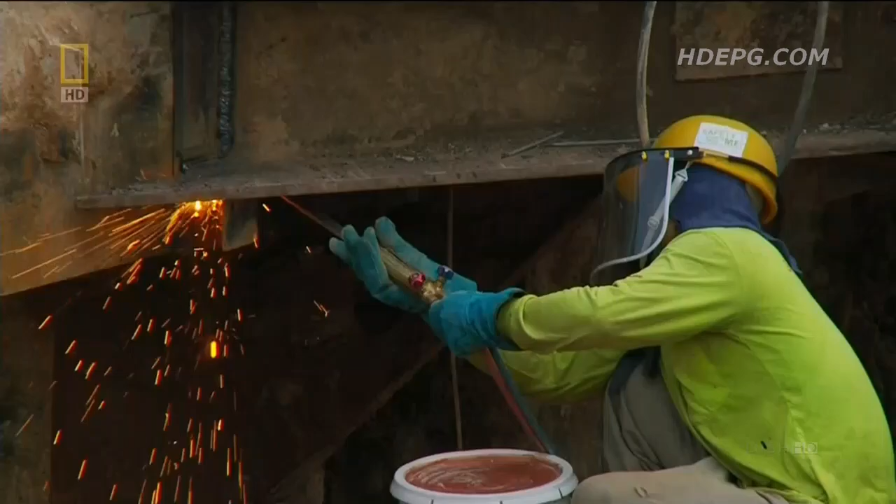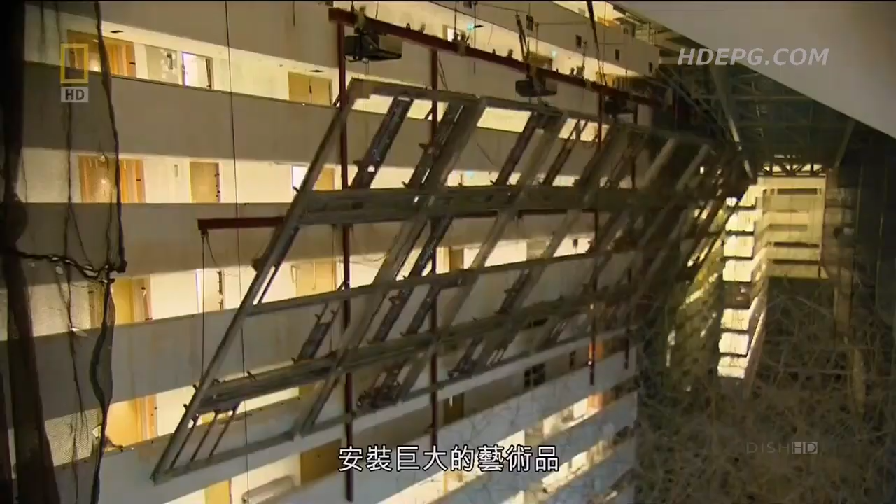Singapore's Marina Bay Sands is one of the world's most complicated construction projects. Engineers have to build not one, but three skyscrapers that will shoulder a sky park as big as an aircraft carrier. Worst case scenario, we get stuck. They have to devise ingenious solutions to assemble a 60-meter tall museum of impractical dimensions, install giant artworks, and erect seemingly floating pavilions for shopping and entertainment. If engineers succeed, they will create a virtual city unto itself.

Singapore, the Southeast Asian country, is smaller than New York City. The lack of space forces it to build its largest leisure and entertainment hub to date on a small tract of reclaimed waterfront land.

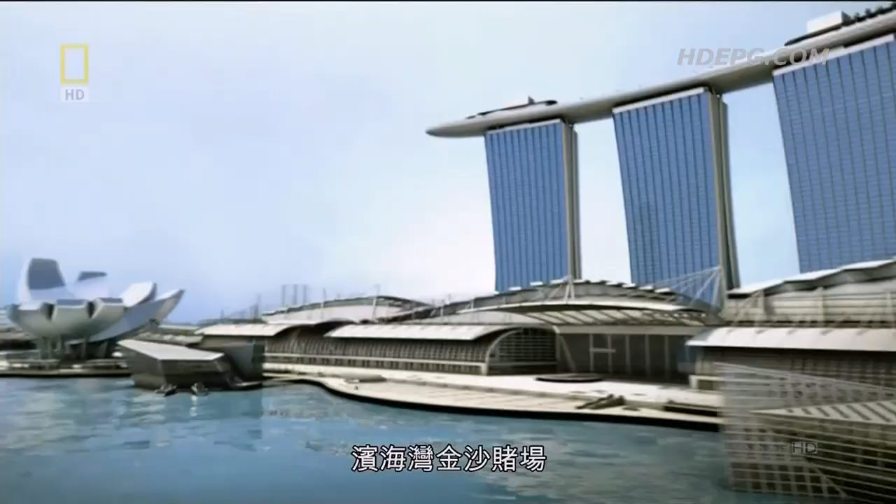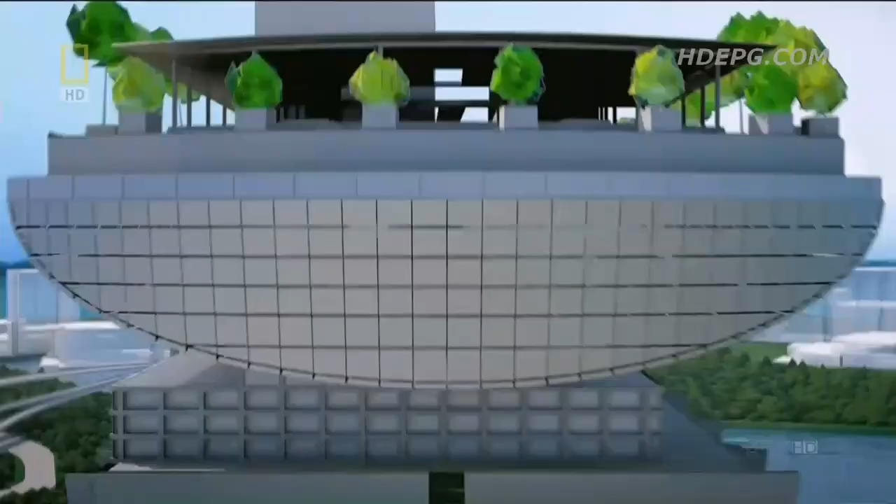The Marina Bay Sands. It's not one megastructure, but many. Serious challenges lie in the array of buildings that form the unique complex. Three 57-story hotel towers slope at such great angles, they're in danger of buckling under their own weight. An even bigger problem is the hotel's roof. A 340-meter sky park spans its length, containing gardens, outdoor pools, and the world's largest cantilevered observation deck. But how do you build something as big as an aircraft carrier, 200 meters in the air?

In the hotel's atrium, mammoth works of art have to be somehow incorporated into the architecture. Its challenging centerpiece, a 15-ton mass of steel by a renegade artist from Britain.

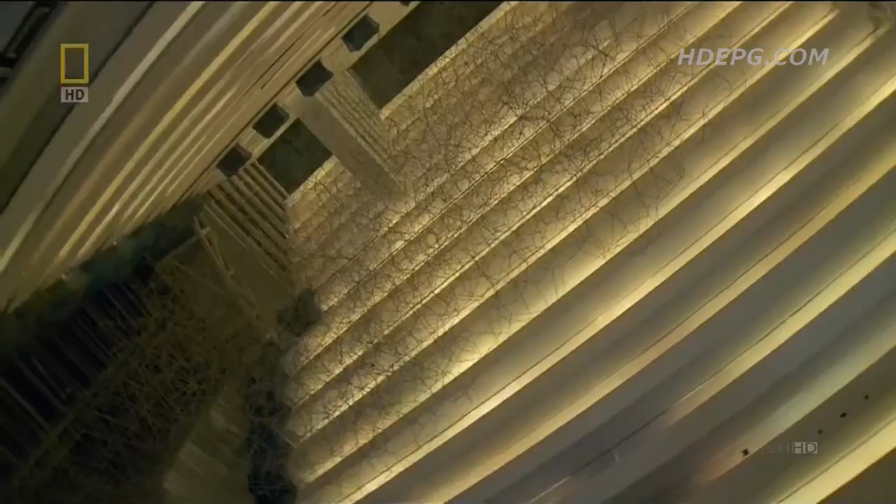A 60-meter tall Art Science Museum is designed for maximum visual impact. It will be to Singapore what the Opera House is to Sydney. Only one problem: it seems too impractical to construct.

And a set of dramatic glass-encased pavilions, while themselves pose little challenge, have to be built in water.

The man behind the Marina Bay project understands the risks, but he believes that anything short of astounding will fail. Sheldon Adelson, one of the world's richest men and CEO of Las Vegas Sands Corporation.

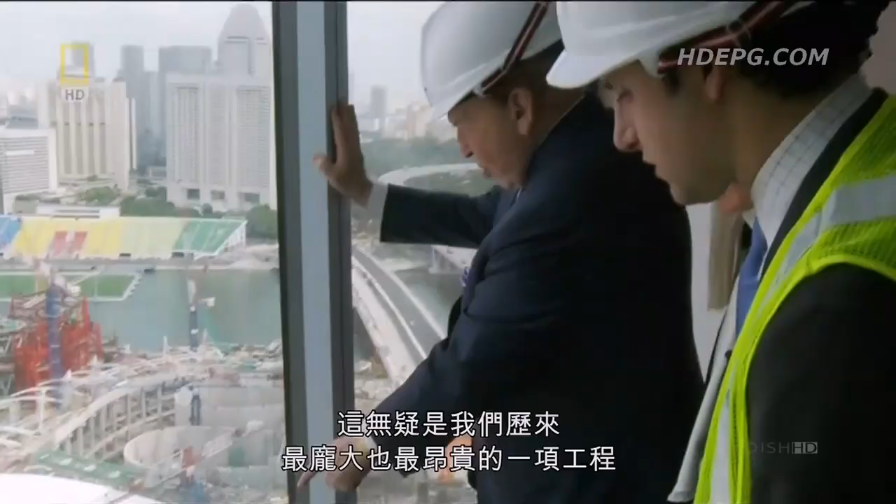What we hope to accomplish is to change the face of Singapore tourism. So we expect a very successful development. That is by far the largest and most expensive single project we've ever undertaken. It'll cost about 5 to 5.5 billion US dollars. It's a lot of money. Now, I know a billion dollars doesn't buy what it used to, but by any measurement, it's a lot of money today.

Adelson believes his huge investment is safe in the hands of Moshe Safdie, a world-renowned architect. Safdie is recognized for his use of dramatic curves and geometric patterns. The Marina Bay complex will be his largest and most difficult project yet.

I think that architecture has to be timeless. Therefore, what it espouses, what it provides, needs to be something that has a long life. What's unique about Marina Bay is all the pieces coming together. You can't think about it as individual buildings. You've got to think about it as a piece of city. It's much more a symphony than it is a sonata.

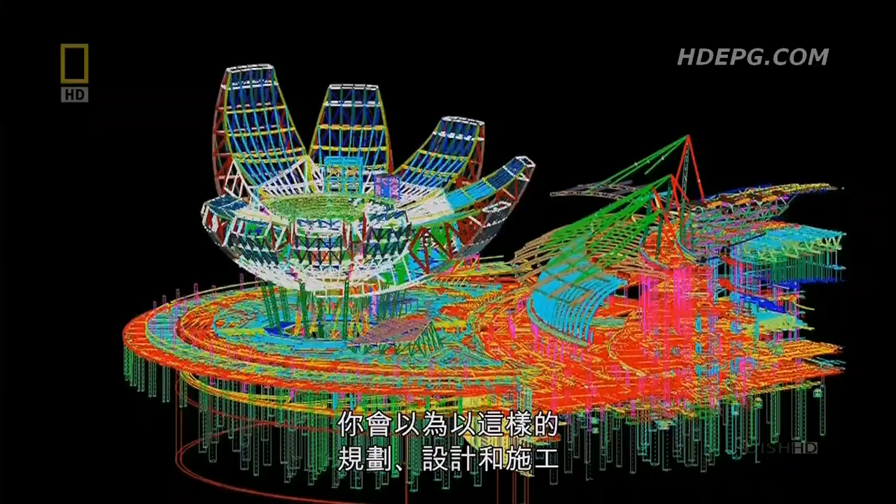On the ground, engineers are more concerned about the reality of building Safdie's vision. This is the North Retail section area. 30-year veteran John Downs is in charge of overseeing the entire project. The design is very, very diverse, and each component of the project is totally different from the others. For a project of this size, you'd expect with the planning, the design, the construction, somewhere between 6 to 7 years. Here is basically a 3-year turnaround.

The first and most critical construction task is to secure the footprint, though this normally straightforward job proves otherwise, since the site was originally allocated for boats. The complex sits on 560,000 square meters of reclaimed land, part of a decade-long plan to revamp Marina Bay, a former saltwater estuary that's now a freshwater reservoir.

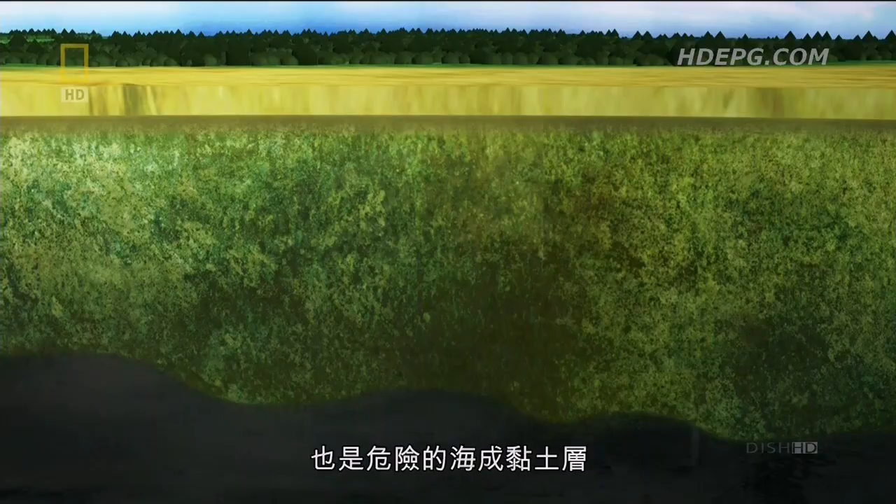Beneath the reclaimed land, which is essentially a seabed, is a dangerous layer of marine clay. Sometimes called black toothpaste, marine clay has very poor structural properties. If not given complete respect, the unstable marine clay is potentially fatal.

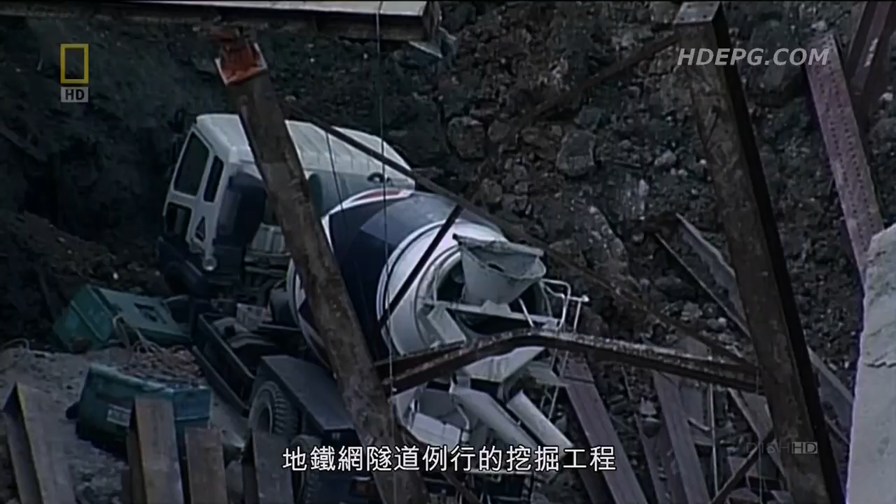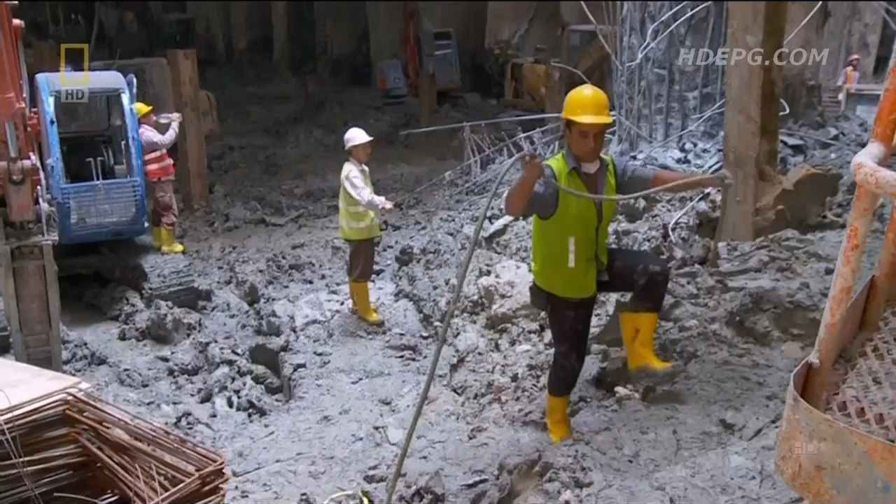In 2004, Singaporeans discovered the lethal consequences firsthand. A routine excavation in an underground tunnel for the mass rapid transit network causes a collapse, creating a gaping hole in the Nicoll Highway, killing 4 workers. The ground conditions in which they were building the Nicoll Highway were not dissimilar to those we are encountering here. They had also soft clay, with similar depths of excavation between 20 and 37 meters. One of the big things learnt from the Nicoll Highway collapse was the importance of monitoring movements and the control of quality as construction proceeds.

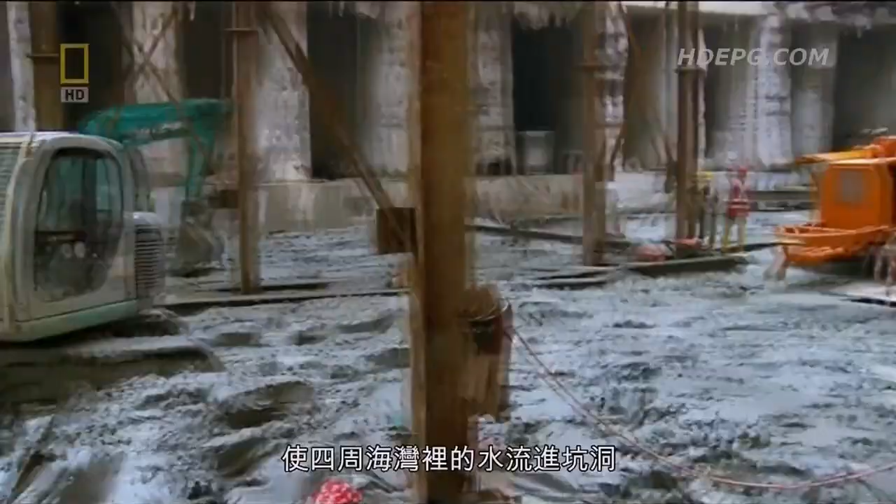Marine clay is an old foe of engineer Mike Barton. He's defeated it in the past by understanding how it behaves. The big problem with marine clay is that it is so soft that when you dig out the inside, the walls will move and potentially collapse and allow all the surrounding water in the bay into the excavation. So, before work can begin, the unstable building site needs major fortification.

To combat marine clay, engineers decide to build giant concrete walls to create stabilizing perimeters for the larger buildings, known as diaphragm walls. Up to 1.5 meters thick, diaphragm walls are steel-reinforced concrete sections, pounded 50 meters into the ground. They form watertight enclosures for men and machines to work round the clock.

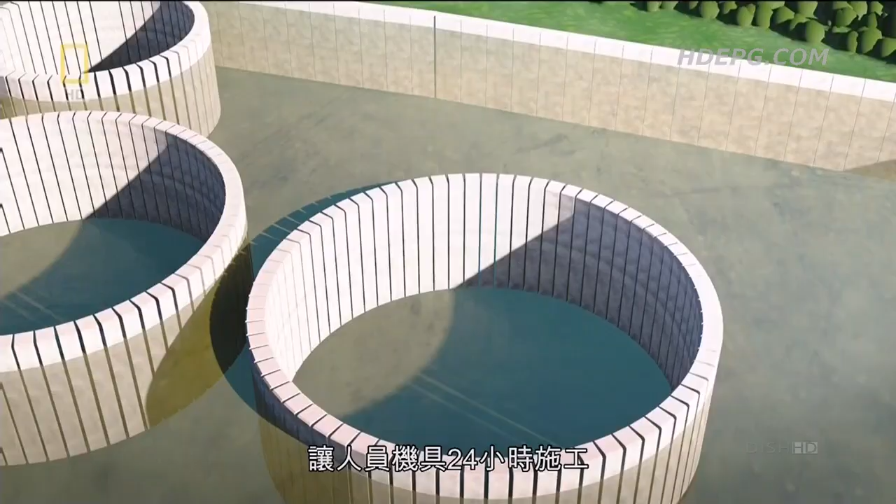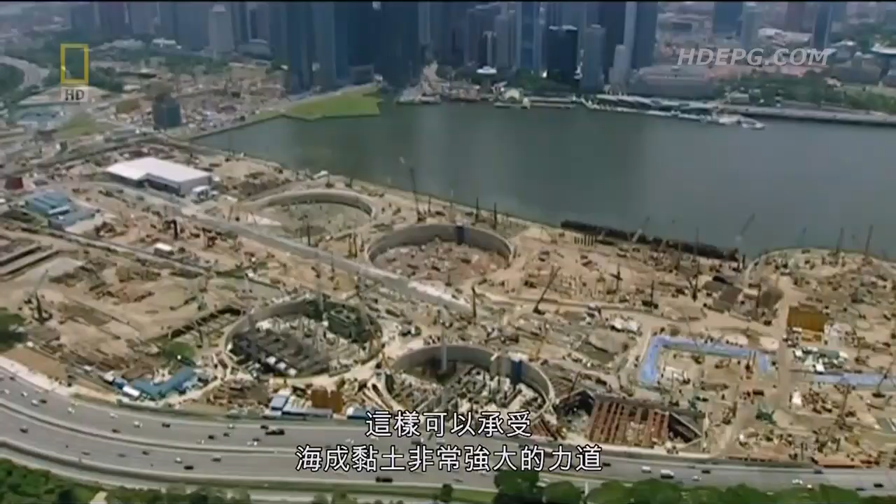In just 1 year, over 4,000 meters of diaphragm walls help produce a rock-solid foundation. The diaphragm walls that we constructed in a formation which we called a peanut formation, which is 2 circles joined together, and a donut formation, which is circular, are able to withstand very, very large forces from the marine clay without any movement. They encapsulate an area that's bigger than a football pitch that enables us to excavate very quickly and to build structure up very quickly.

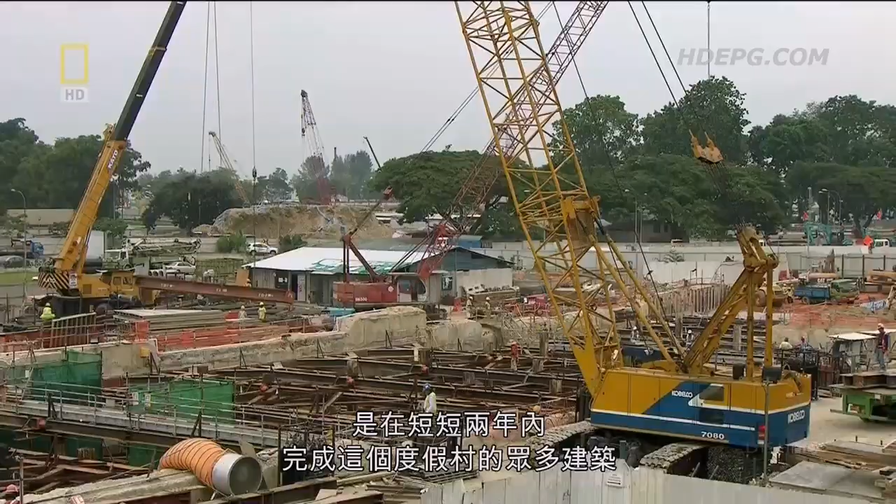Securing the footprint of the Marina Bay project has already taken a year out of John Downes' schedule. He now faces the difficult task of erecting the resort's many buildings in a space of just 2 years. Just managing the whole logistics of that, including the construction methodology, is very, very challenging for us.

To meet his tight deadline, Downes chooses the most direct solution. He hires 16,500 workers to construct every single building, simultaneously. It's like leading a small army. So organizational excellence is key.

We're just on the edge of Singapore in the CBD here. So rather than lose the contractors and the workforce to go off-site, we built our own 3-story project office. We have all of our contractors, our subcontractors here. We house our resident site staff. We have our project management team. We have our construction management team, our design management team, and the logistics here.

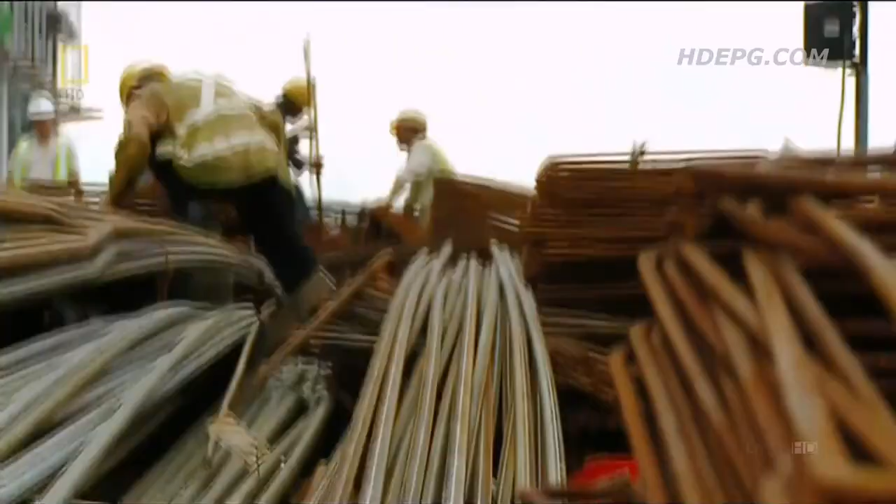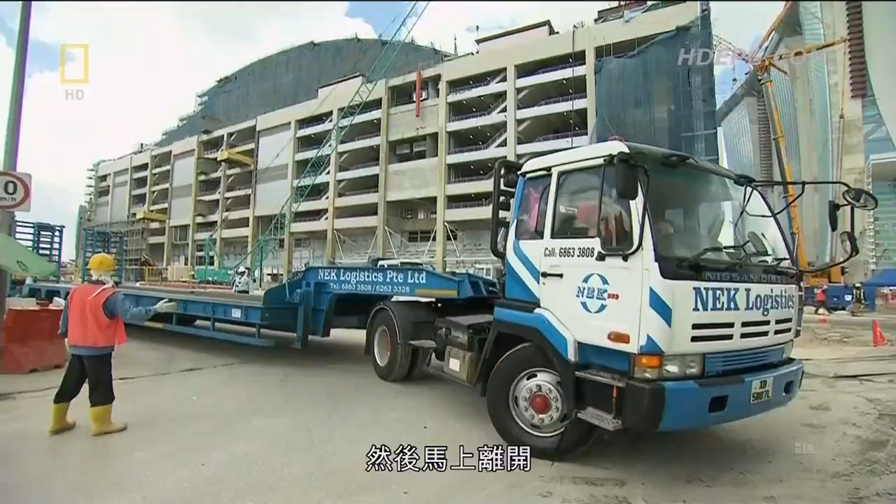The tight schedule also creates problems at the hotel towers, where engineers are already struggling with a congested site. The important thing to do is to make sure that they come in and deliver the goods straight away and then get out again. We don't want too many vehicles on site at the same time.

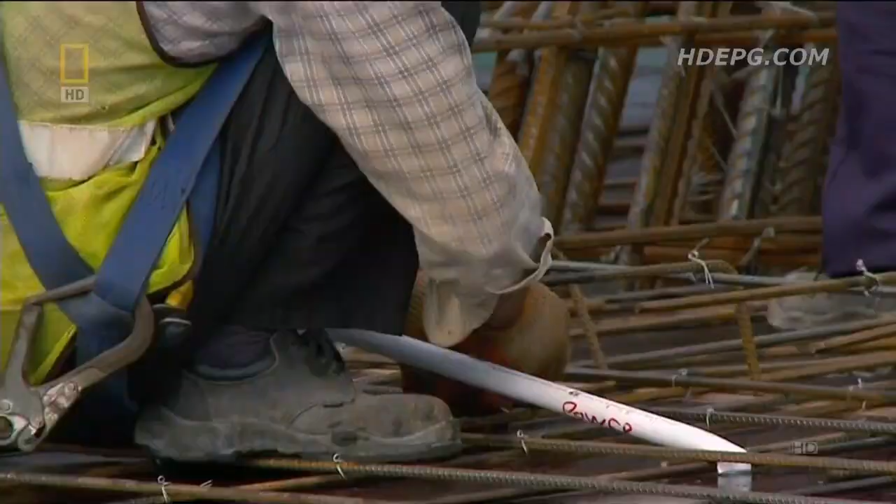To speed up construction and alleviate traffic congestion, engineers turn to a method that's proven itself countless times in the field: in situ concrete casting. Hotel walls are made on site in the thousands. And workers laying the floors are so proficient, they produce 1 floor per 4-day cycle. It's an impressive display for a conventional solution.

But the structure they're attempting is anything but conventional. The key challenge of building the hotel towers is its unusual design. Unlike other skyscrapers, part of the towers slope at incredible inclines. Like a set of collapsing dominoes, the towers could buckle under their own weight if a practical building solution is not found.

It's a major concern for engineer Craig Glover. I've been in the industry for 25 years, done a wide range of projects in many different countries, but nothing compares to this whatsoever. There was nothing we could take reference from across the street, on the next high-rise, or across town. This is a new frontier.

Costing a staggering $5.5 billion to build, the Marina Bay Sands could be one of the world's most expensive mistakes if engineers can't solve the tower's problematic structure.

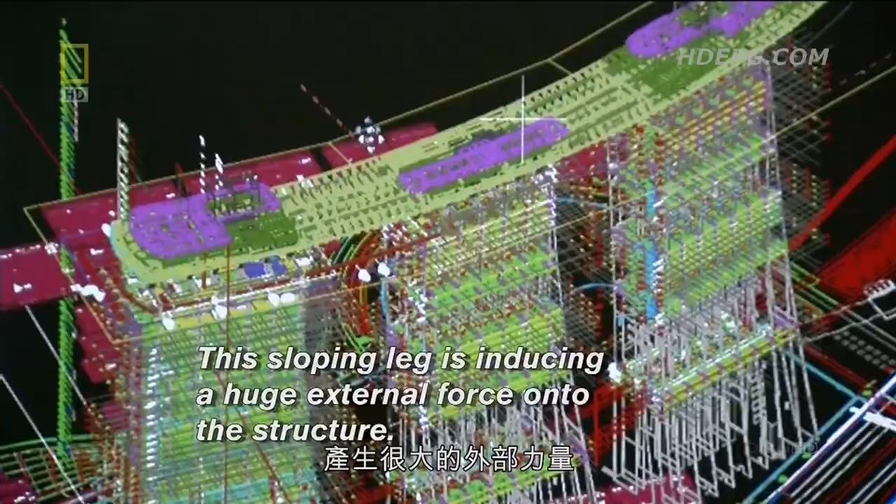Engineer VC Cheong leads the design team, and their solution comes out of left field. If you look at the configuration, it's not a straight tower. It's with a sloping leg. So all this sloping leg actually is, inducing a very huge external force onto the structure. We cannot build it without any support. So we actually formulate a solution to prop up the sloping leg.

Using a technique they've never employed before, engineers build large temporary struts made of strong structural steel. They prop up the sloping towers as they rise. Like a suspension bridge, high tensile steel tendons, also known as tension cables, give an added layer of support inside the walls. In theory, both the struts and the tension cables are temporary and will be removed once giant link trusses connect the towers at the 23rd floor.

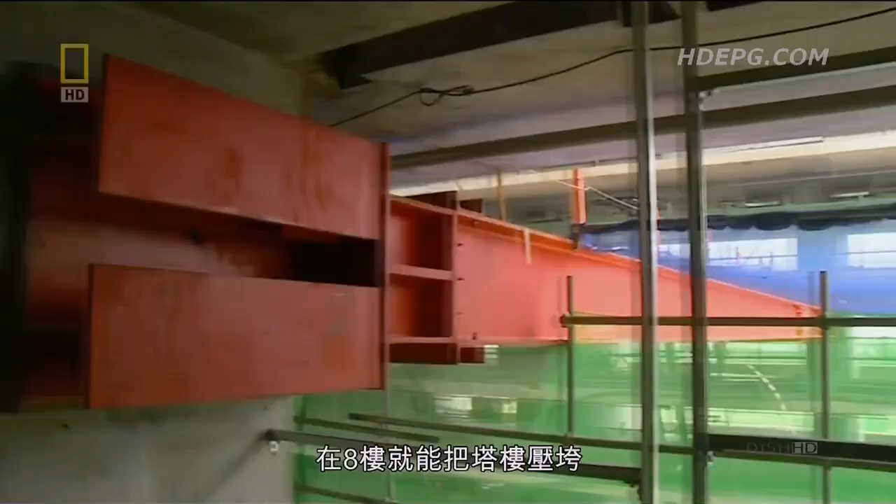The sheer weight in concrete is enough to topple the towers at level 8 if the engineer's calculations are wrong. To reduce the chances of failure, Glover and his team make a radical decision.

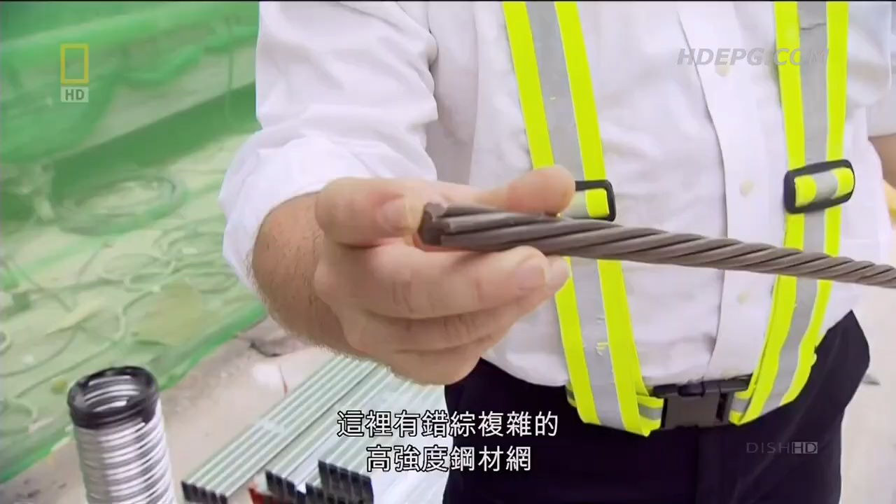Instead of removing the temporary tension cables in the tower walls, they make them permanent supports. I feel good it's in there because it's added strength, it's added support. We have a twined network here of high-strength steel. And what we do is we bundle these up so they form a cord with multiple strands inside this conduit.

We place this conduit inside the walls prior to casting the concrete. So what we then do is once the concrete is cast, we anchor one end into the concrete. So we then put a very high-strength hydraulic jack onto the collar and one by one pull these strands through and tension them up. What that does is basically pull the building back and hold it in place.

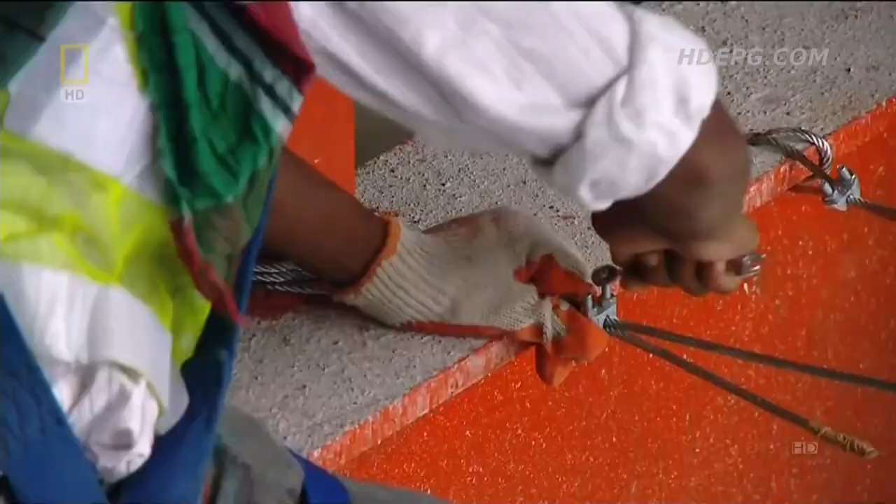If these cables were to suddenly break, or if they weren't in place, we wouldn't be able to control the self-weight as we build more and more of the building up. Despite the team's quick thinking, the true test of their engineering decisions will only happen once the main support struts are removed and the massive link trusses installed. Link trusses are huge reinforced steel brackets that bind the towers at the 23rd floor.

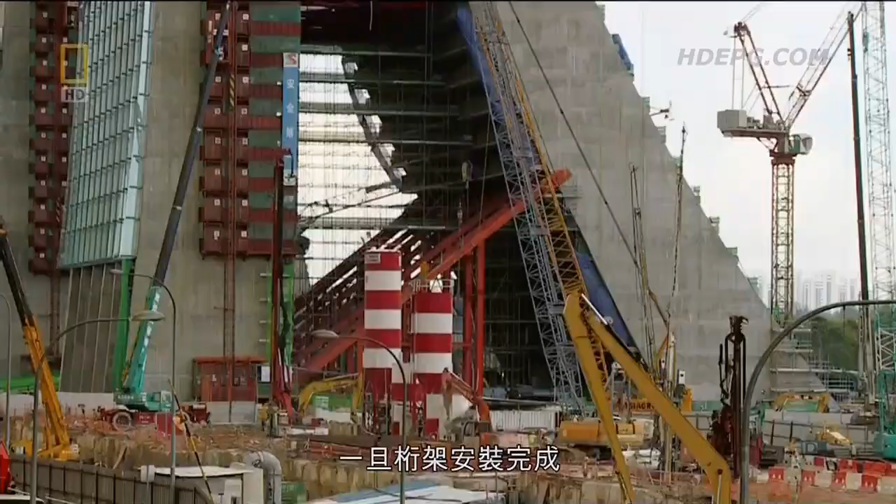Once their installation is complete, they transfer the sloping tower's weight completely away from its temporary struts. Once we're satisfied that we don't have any stability issues, then we can bring the large hydraulic cranes in and, member by member, start to dismantle the struts. We've got a lot of time pressure, so we've just got to make sure that these things keep moving.

As the last pieces of support struts leave the site, Glover and his team can finally breathe a sigh of relief. The link trusses are holding the building load. So far, so good.

Not all the structures have ended up according to plan. The 60-meter-high Art Science Museum is facing a major design overhaul. Planned as a venue for blockbuster exhibitions on the arts and sciences, its bowl-shaped roof doubles as a 3,000-seat amphitheater.

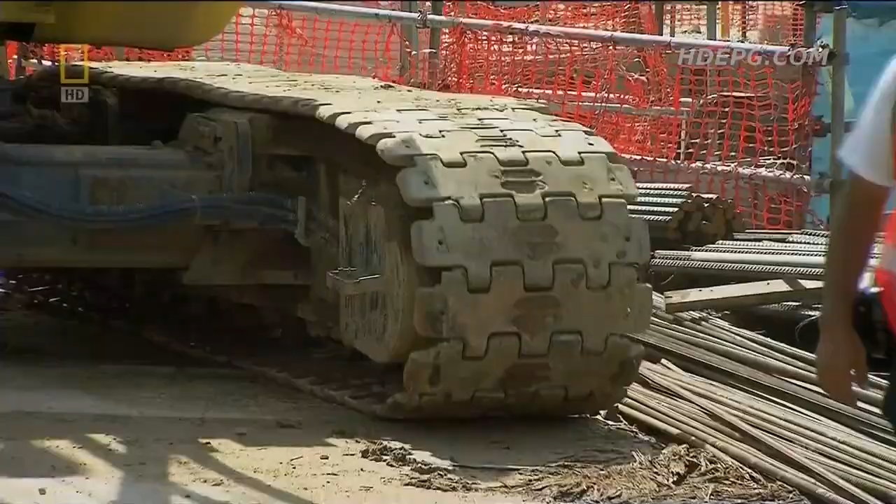Unfortunately for engineers eager to start its construction, architect Moshe Safdie isn't happy with its current shape. Somebody looked at them and said, looks like a bunch of bananas. In fact, Mr. Adelson said, looks like a bunch of bananas. I said, well, if they look like a bunch of bananas, we're not there yet.

It's terrible news for Safdie's design team, especially its principal, Gene Dyer. There are times that Moshe will come in with an idea. We think it's quite exciting. We'll pursue the idea for weeks or even months. He'll come back and say, I want to change the idea. And we've already bought into the idea, so it's a bit frustrating.

To rework the unique geometry and dimensions of the Art Science Museum, Dyer and his team turned to advanced 3D modeling programs. It not only makes navigating the museum's complex geometric patterns easier, it shortens the process to a matter of days. The model is dynamic and it can be moved by just changing one or two elements.

Moshe could experiment. He could make rapid judgments in a very short period of time about which way he wanted to take the project. This is a process that was impossible to do 10 years ago. Without the computer, this would take years and years and years.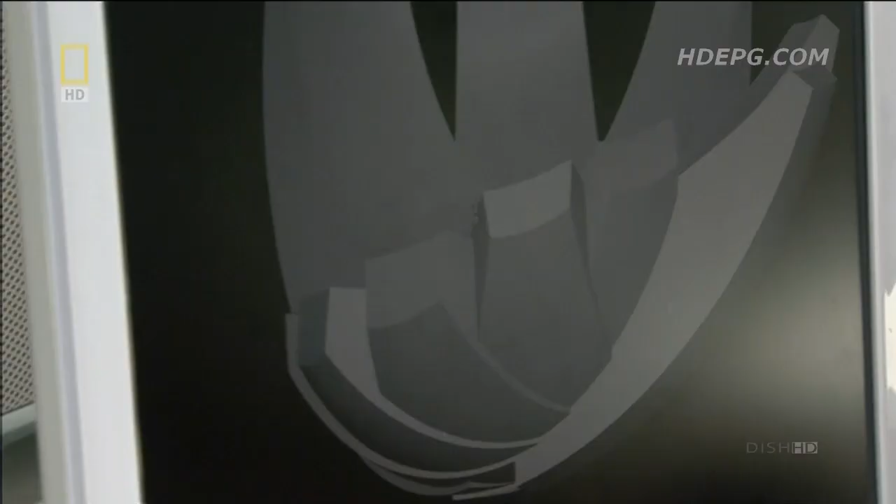After months of refining the design, Safdie is finally happy with the result. The mathematical precision that we gave them made them even more beautiful. It led some people to say, well, hand of welcome. Others said, is that a lotus? And the more ambiguous the associations, the closer I thought we were getting to our target. Because I think the least exciting buildings are those which have overt symbolic associations.

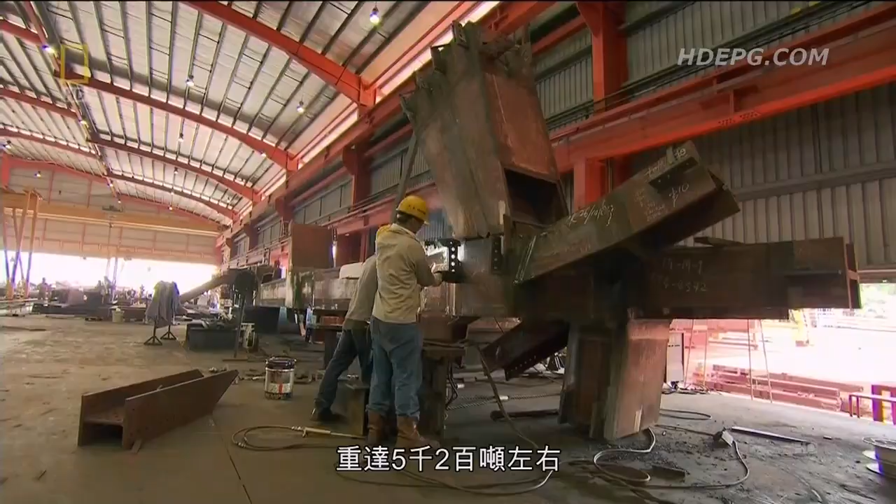Armed with the new design, engineers begin work on the museum's 60-meter-high superstructure. A staggering 5,600 steel elements, weighing some 5,200 tons, are prefabricated to exact specifications. They are then trucked onto site and assembled.

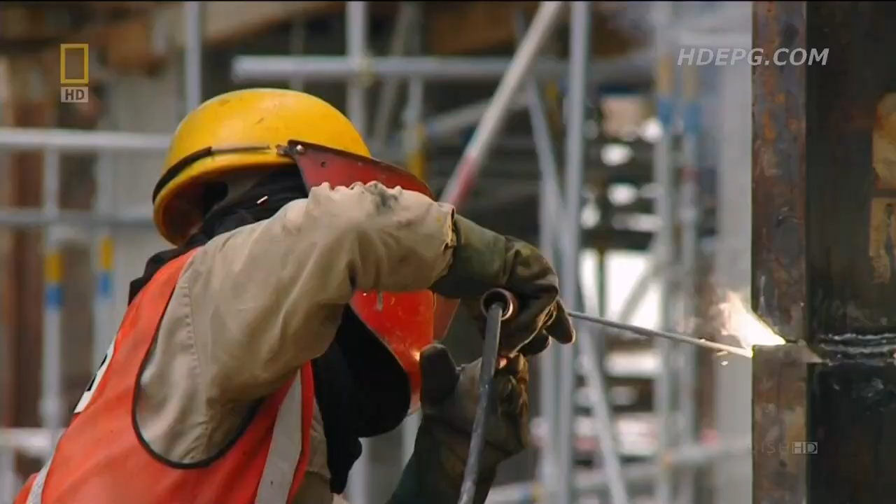It's like putting together a giant jigsaw puzzle. Each element has to be installed with pinpoint accuracy. If it's even a few millimeters off, engineers will have to start from scratch.

Engineers of the massive atrium at the base of the towers are facing an equally tough construction process. Safdie has come up with a challenging design. He wants to inject art into the atrium's architecture, so that visitors will feel like they're walking through a grand Gothic cathedral.

In medieval times, if you think of a Gothic cathedral, there's the architecture, there's the stained glass windows, there's the sculptures on the pinnacles. You cannot draw a line and say art and architecture. Art and architecture are one, they're singular experiences. And I think what we try to do here is come back to this integrative mode.

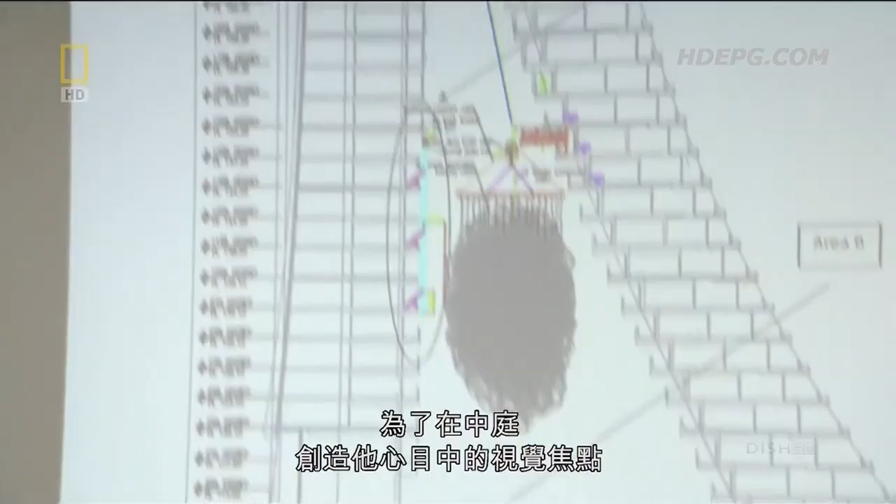To create the centerpiece of his vision for the atrium, Safdie commissions renowned British sculptor Antony Gormley. Famous for his unusual approach to art, Gormley is the brains behind the Angel of the North sculpture in northern England.

What he's about to attempt is proving to be more of a construction challenge than an artistic one. A cloud-like sculpture some 40 meters long, made up of 15 tons of high-grade stainless steel, hung 12 stories above the atrium.

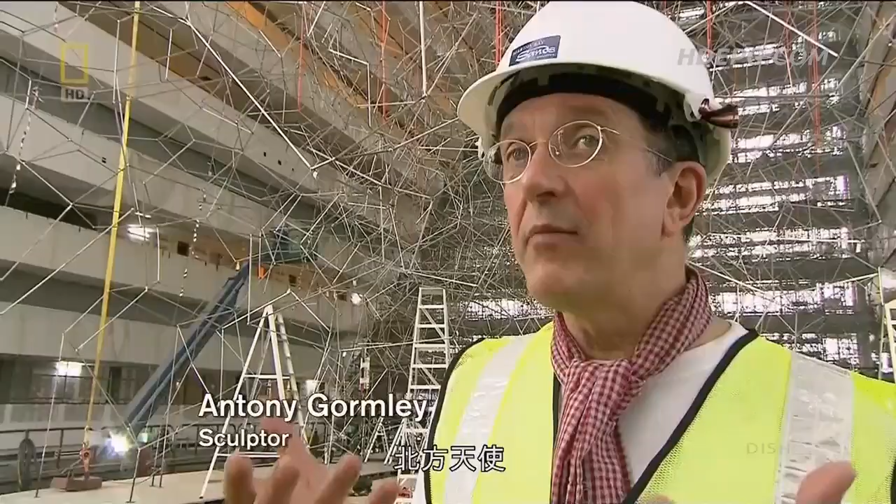The Angel of the North is, in a way, making a very traditional public sculpture because it's isolated in space at the edge of a valley. You can see it for miles and miles. It's very much about occupying space. This is about activating space.

But just as they're about to begin construction, a bombshell drops. September 2008, a global financial crisis wreaks havoc on markets. The flow of the hundreds of millions of dollars that keep the Marina Bay project going every month suddenly stops.

For engineer Matthew Pryor, it's a massive blow. I feel devastated. I mean, it couldn't be worse. Probably the worst day of my life professionally.

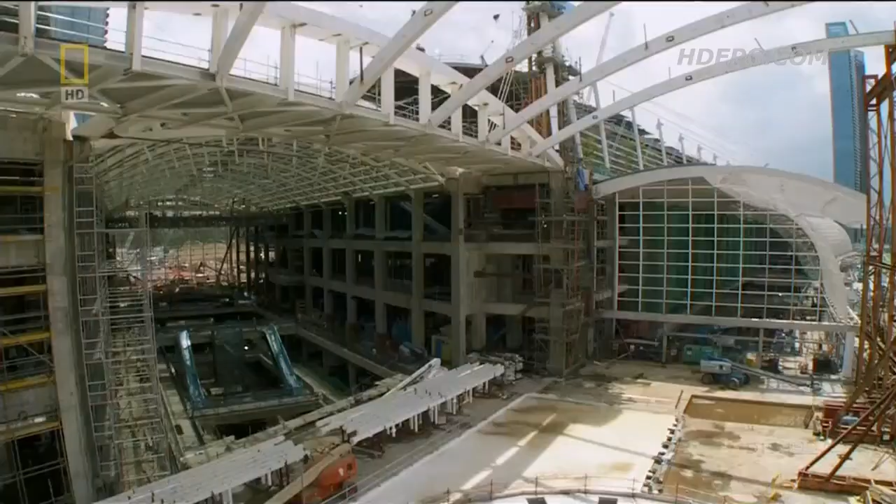There's no more money coming through. So unless we put some funding in place or there's something, we're going to have to shut the jobs down. It is a tough decision to be made, and we don't know what we're going to do just at this point in time.

With the future of the multi-billion-dollar project plunged into doubt, all eyes turn to the man behind it, Sheldon Adelson. The next move of one of the world's richest men will determine the fate of the mega construction site.

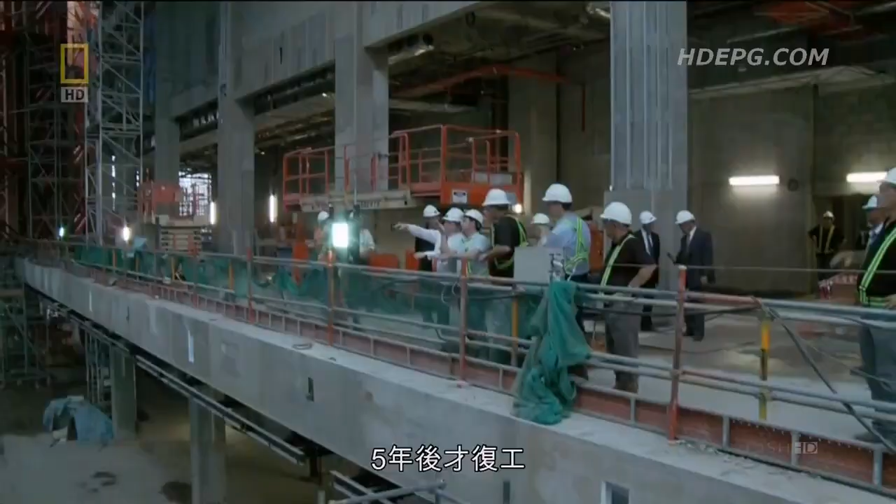The 2008 global financial meltdown is a haunting echo of the 1990s Asian crisis. Back then, progress on Shanghai's World Financial Center came to a complete halt for 5 years. For Adelson, that's simply not an option for the high-profile Marina Bay resort. His vision of changing the face of Singapore tourism is at stake, and so are billions of dollars of investment from his Las Vegas Sands Corporation.

He prefers finding a stopgap solution to weather the storm. Throughout history, there has never been a trend that went straight up, nor a trend that went straight down. So it goes up and down. It's only a matter of time when things will recover.

In a bold move, Adelson pledges his vast personal wealth to the completion of the project, effectively ending any speculation of failure.

There's a massive sense of relief in the company. I mean, everyone pleasantly surprised how quickly we've got through this and the fact we could hold it together and get it going again. So euphoria is probably the best way to describe it.

With the crisis averted, construction on the 3 55-story hotel towers, the casino, theaters and convention center resumes at pace. Everywhere you turn, steel is being installed. It's vital reinforcement for every concrete structure on the 15.5-hectare site.

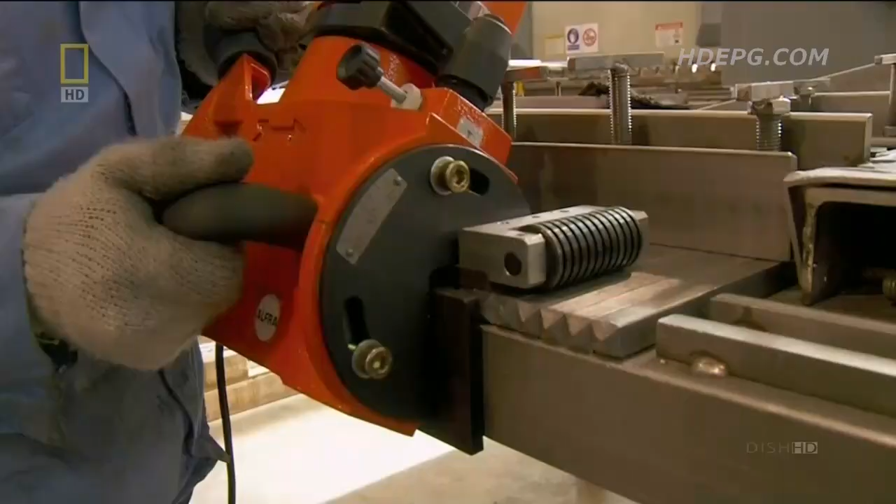For one project at the tower's atrium, steel is more than just reinforcement. To construct the 15-ton drift sculpture by British artist Antony Gormley, engineers had to first laboriously prefabricate it into over 70 segments.

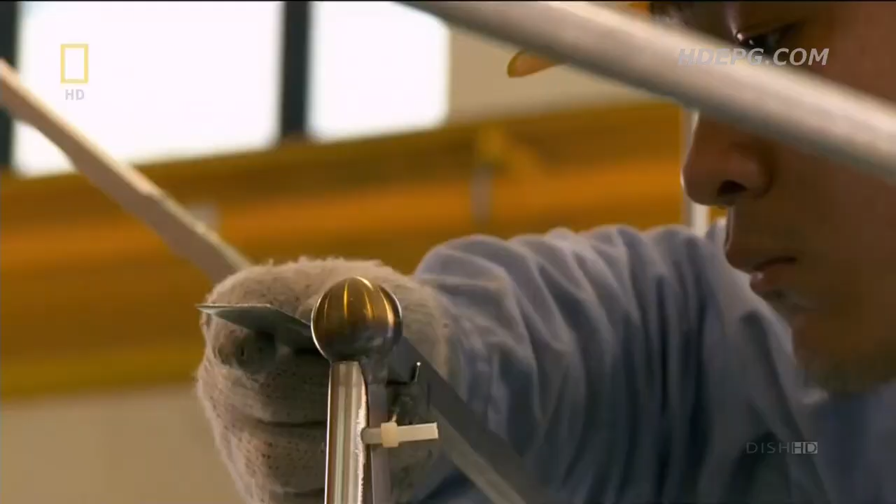The segments are then welded into 8 slices and will ultimately form the sculpture. It's a tricky operation, but engineers are able to complete it swiftly due to a system of codes and numbers that enable them to quickly identify what goes where.

Once all 8 slices of drift are fully assembled, it's lifted up into position by a temporary lifting frame. A massive box truss on the atrium ceiling then takes over the load. In theory, the box truss will support the weight of the lifting frame as it's being lowered down.

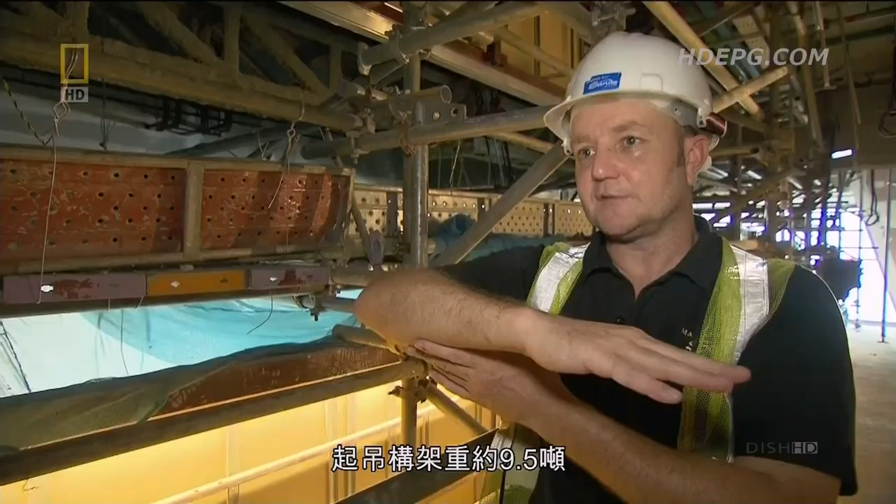It will be a heart-stopping moment, especially for engineer Graham Stevenson. The lifting frame is about 9.5 tons, so when it picks up and gets some momentum, there's a potential that it just wants to flick over and rotate through its full 90 degrees, and we won't have it under control.

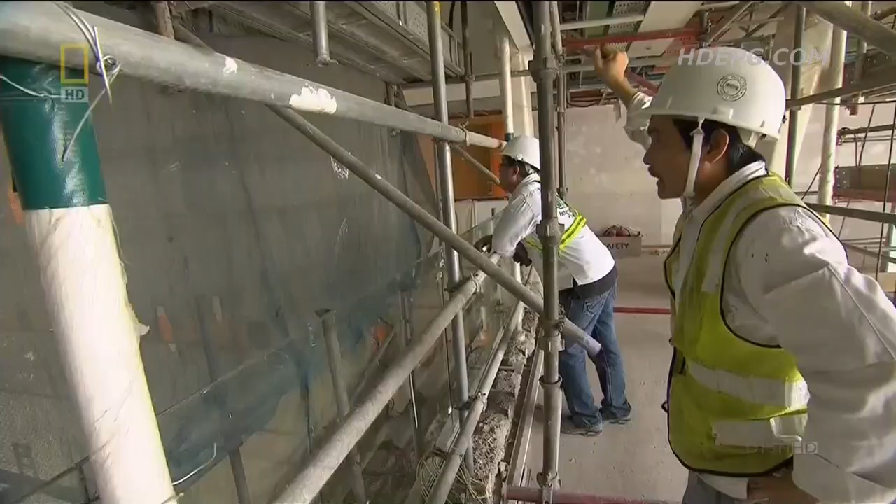Stevenson's solution: 4 powerful automated hoisting drums located at the 4 corners of the frame. They allow workers to control the strength and speed of the operation with high tensile steel cables. A spotter at the top determines the pace of the procedure and marshals the team.

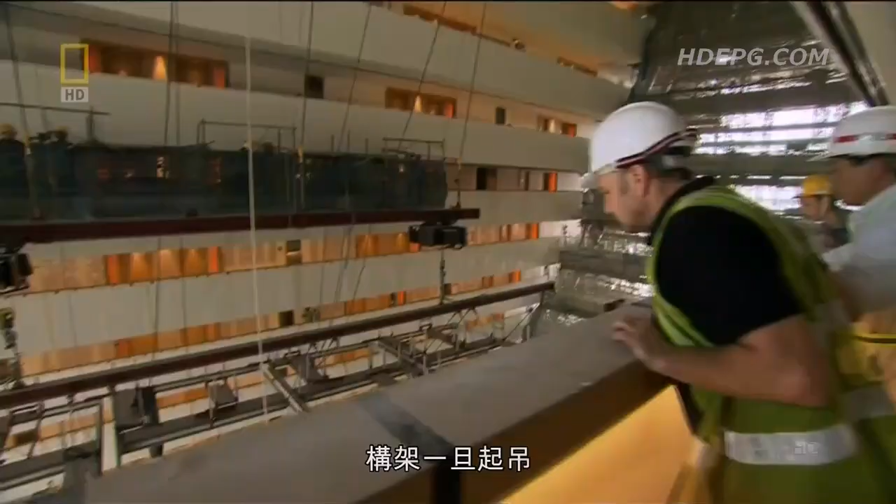The entire operation is estimated to take up to 10 hours to complete. As soon as the frame is in motion, there's no turning back.

Midway through the lift, Stevenson receives reports of a potential problem: a 22-story, number 7 temporary cable, with scaffolding touching the cable.

Why have you got the temporary cable touching the transverse? Yeah, but is it just the end of a tube? Yeah. So you can just cut the tube? Yeah.

Problem solved. But what was previously an estimated 10-hour procedure now turns out to be a 24-hour marathon lift.

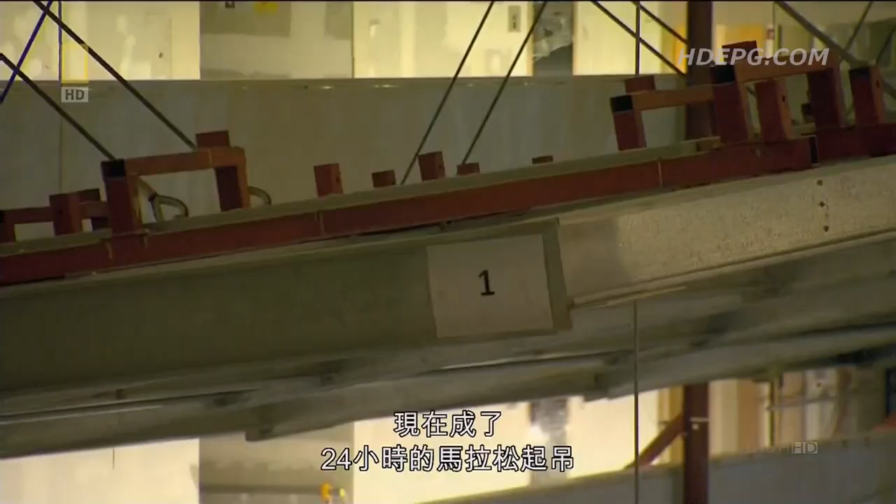At 6 a.m. the following morning, they complete the job. Absolutely fantastic. The Gormley is now finally in its final position, so really an end of a long and exhausting day, and big thanks to everybody, but it's finally done.

While the drift settles into its new home at the hotel atrium, elsewhere attention is focused on one of the project's key features: the Crystal Pavilions. The 2 glass-encased buildings by the promenade are set to be the resort's premier shopping and entertainment complexes.

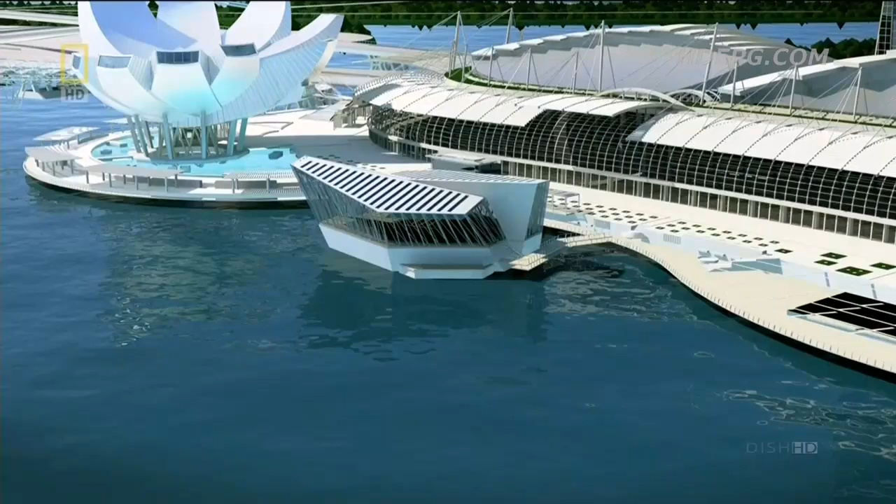But before engineers can make them a reality, they have to secure their footprint, and already a major obstacle threatens to sink their objective. The Crystal Pavilions are situated within the confines of Marina Bay, so to found it, engineers have to find a way to build in 6 meters of water.

The responsibility of tackling the problem falls on the shoulders of engineer Kurt Vella. I'm from Sydney. The underlying foundation in Sydney is sandstone, it's rock. All you need to do is just dust off the surface and you can build skyscrapers on it. Here it's very different. All the structures have to be heavily founded.

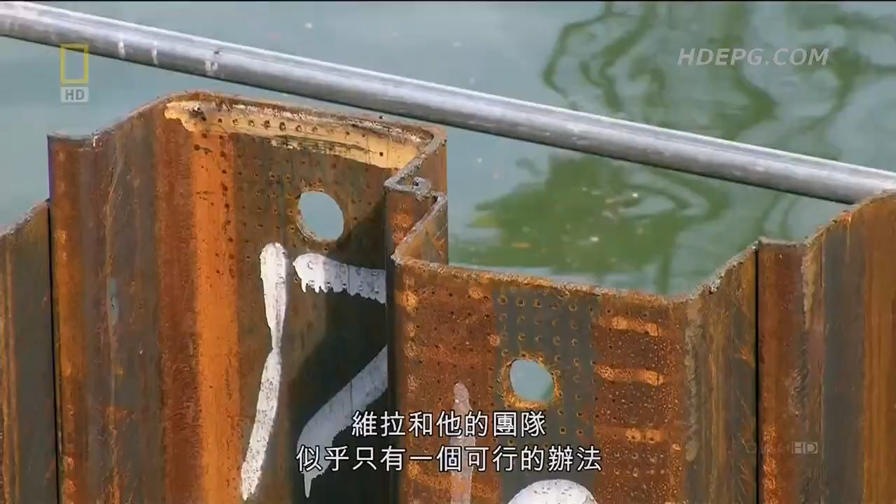To keep water out of the construction site, only one solution seems viable for Vella and his team: a waterproof steel structure called a cofferdam. This temporary formation surrounds the worksite with a circle of steel sheet piles, creating an impenetrable shield that locks out the water, keeping the workers safe within.

For the job, they rope in a 12-ton vibro hammer. It punches the sheet piles deep into the earth, making the cofferdam rock solid and resistant to movement.

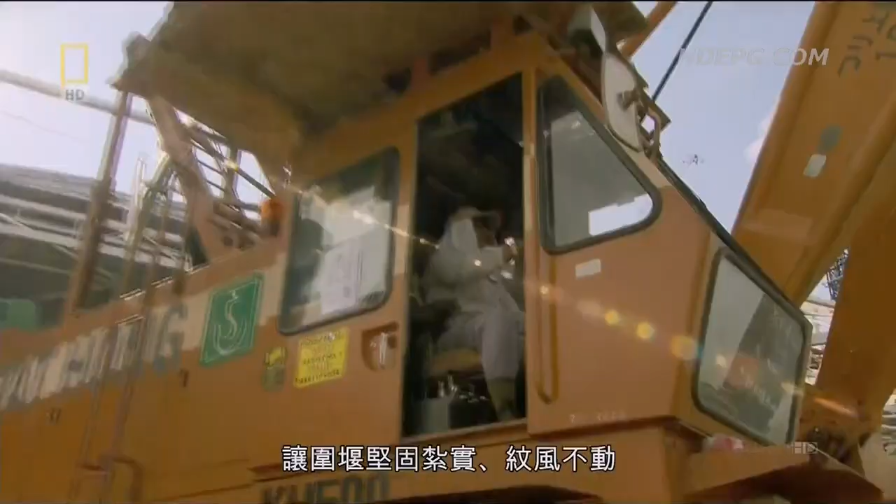With the cofferdam secured, engineers deploy powerful diesel pumps and run them 24 hours a day, ejecting any water that remains within the walls.

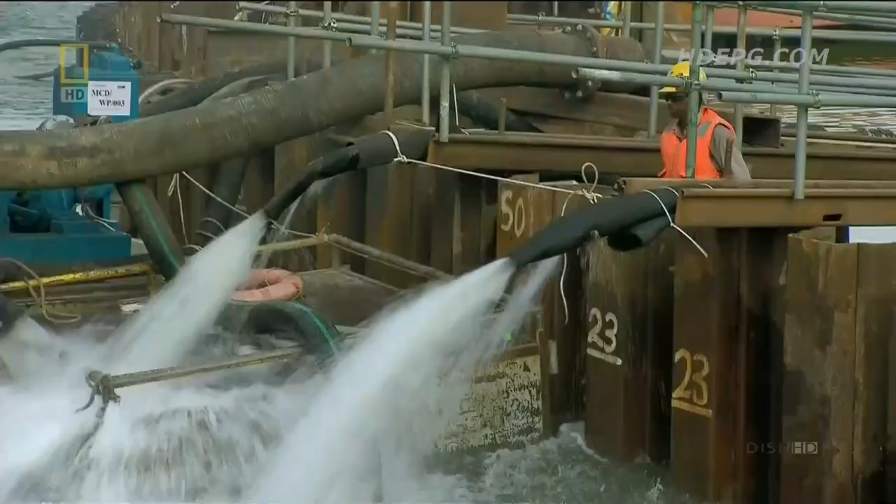This last step comes with inherent dangers. The force of the water outside creates what engineers call hydrostatic pressure. In theory, it's powerful enough to force water through any gaps in the cofferdam.

It's something that Vella prays will not happen. There's a bit of hesitancy and concern because we've got to build this building in the middle of Marina Bay. Everybody can see what we're doing, so if it leaks, it's a problem. If it fails, if it moves, if it collapses, it'll be an absolute catastrophe.

After a day of pumping, Vella's worst fear comes true. Parts of the cofferdam are leaking.

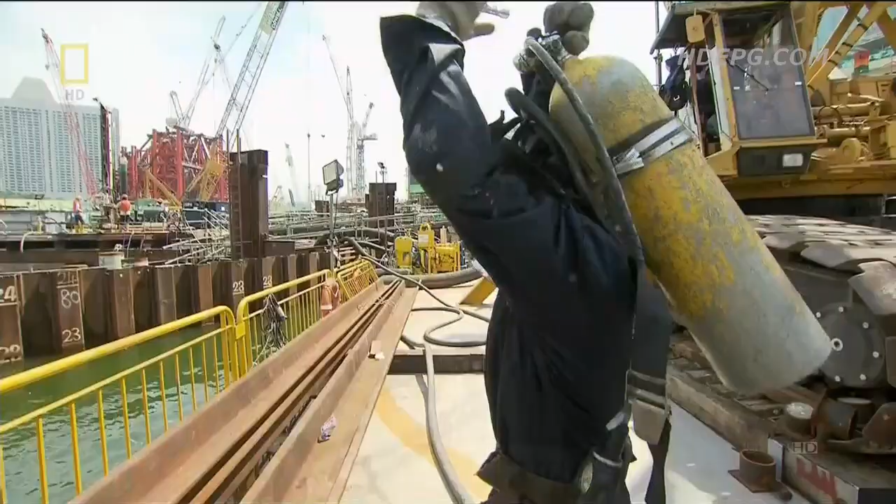To rectify the problem, Vella orders a team of 8 divers into the water on 10-hour shifts. Their mission: find out where the water is being forced in and plug them shut with epoxy resin.

Anson Lee is an 8-year diving veteran. The toughest part of my job is the environment. The visibility is poor here. It's totally zero, I cannot see anything here below. I solve that by feeling the suction of the leak which I then fill up.

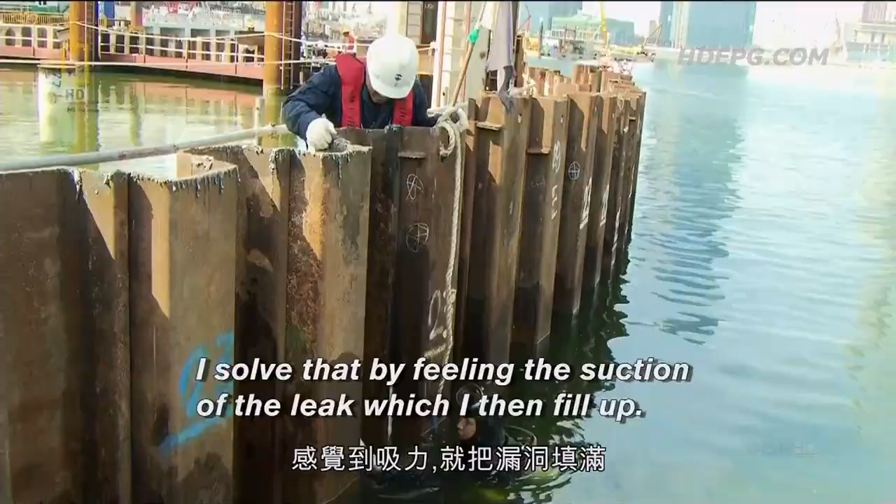You have to overcome all the fear that you can't see under the water. But okay, I feel proud to be one of this team to build this thing out.

After 2 weeks of hard work by divers and the pump crew, the job is finally complete.

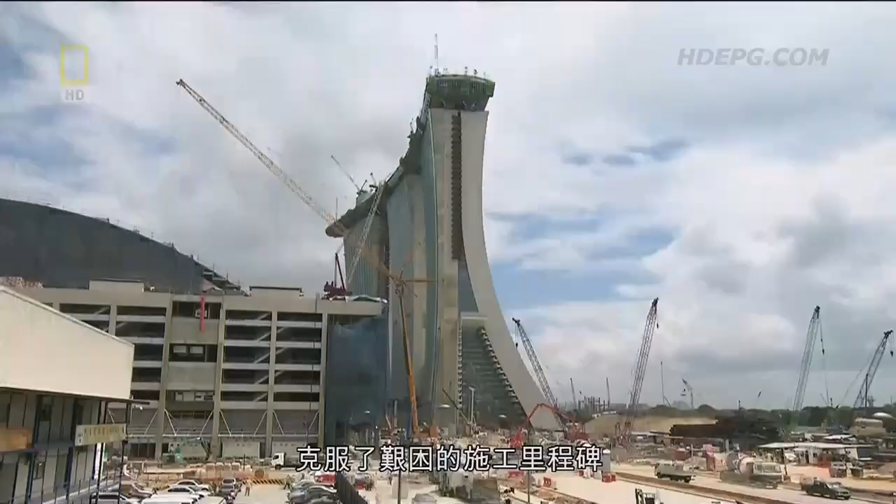After 2 years of battling the elements and overcoming difficult construction milestones, the 3 sloping towers of Marina Bay Sands can finally celebrate their topping off ceremony and move on to the next phase.

But a destructive force of nature threatens to throw a spanner in the works. With climate change predicted to affect the pattern of Southeast Asia's typhoons, Singapore may one day experience the destructive tropical storms plaguing its northern neighbors in the Philippines and Taiwan.

When that happens, typhoon-force winds could spell disaster for the hotel towers, especially the 340-meter Sky Park sitting on top of it. The force of the wind can make both buildings sway dangerously, causing irreparable damage to the structures.

The Sky Park offers 360-degree views of Singapore. The visionary design will have enough surface area to park 4.5 Airbus A380s.

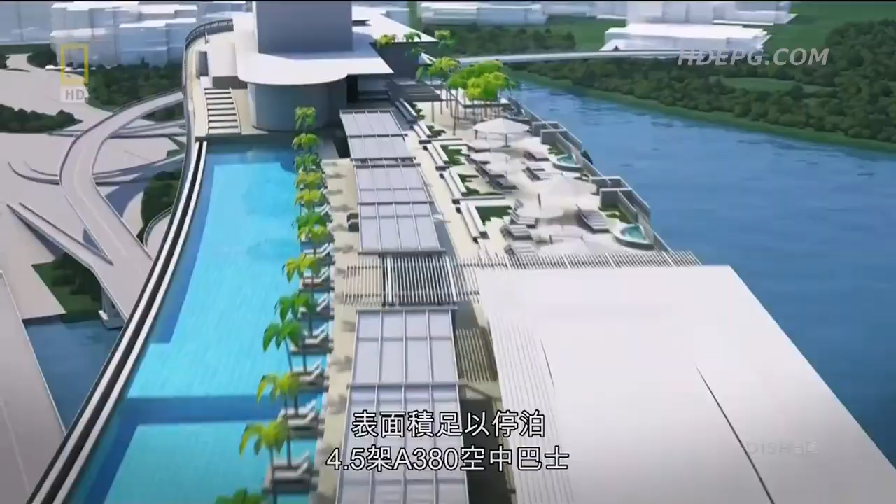But when architect Moshe Safdie first mooted it, it stemmed from a purely functional need. Luxury hotels, as we think of them, always have lots of open space around them, gardens, at least in the kind of tradition. But we didn't have much space left. And at that point, I figured, well, if we cut out of an extrusion of foam the kind of slab that goes over those 3 towers, and we placed it there, and we said, well, what do we have here? My God, that's some park. And so that's where the idea was born.

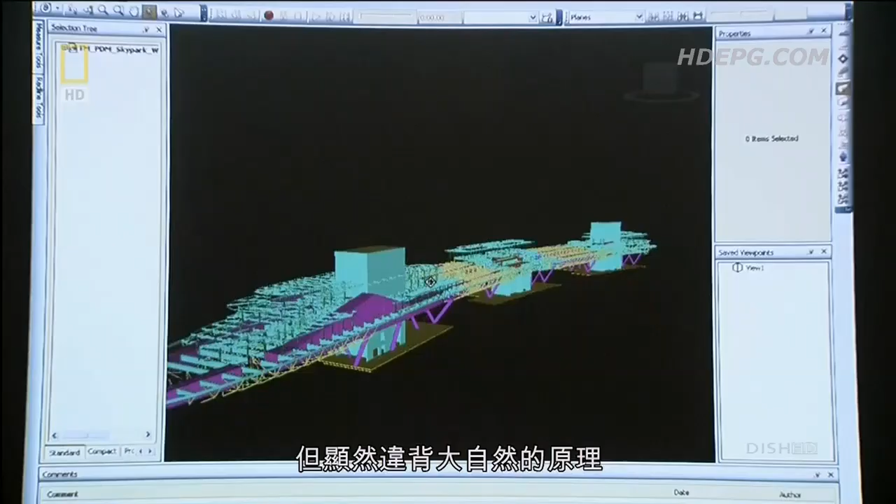Safdie's revolutionary idea scores points for ingenuity, but it clearly isn't what nature intended. Typhoon-force winds threaten to rock the towers and its Sky Park, causing unimaginable damage.

If engineers are to make the building a reality, they'll need a rock-solid solution. Still got to do all this planning. Engineer Tony McKee has little time to make things happen. At the moment, we're running a couple of weeks behind what we'd originally planned. We're not entirely happy about it, but at the end of the day, we've got to do this safe and we've got to do it properly.

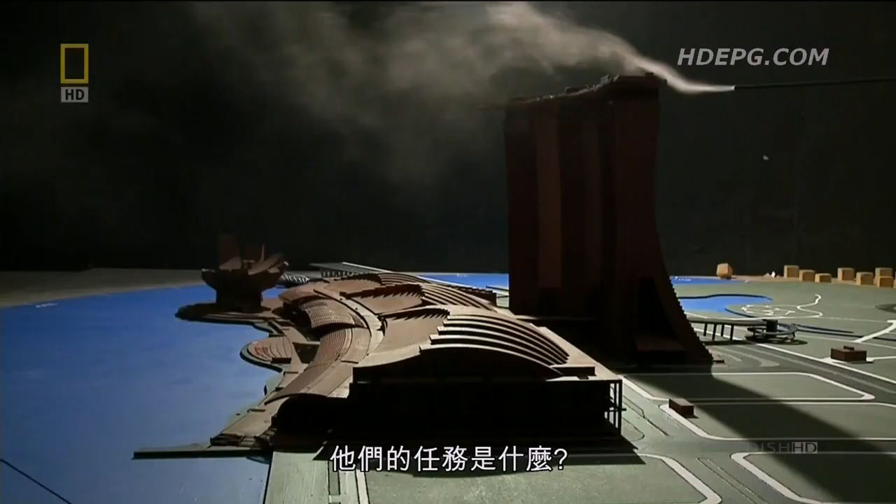To fight the enemy, McKee knows he has to first understand the enemy. He hires leading US wind engineers CPP to carry out extensive testing on the towers and Sky Park. Their mission: find out how Singapore's potential wind forces affect the buildings.

Wind engineer Roy Denoon oversees the process at their state-of-the-art wind tunnel in Fort Collins, Colorado. The thing that makes this really special is the fact that we have this Sky Park running across the top, linking all the towers together.

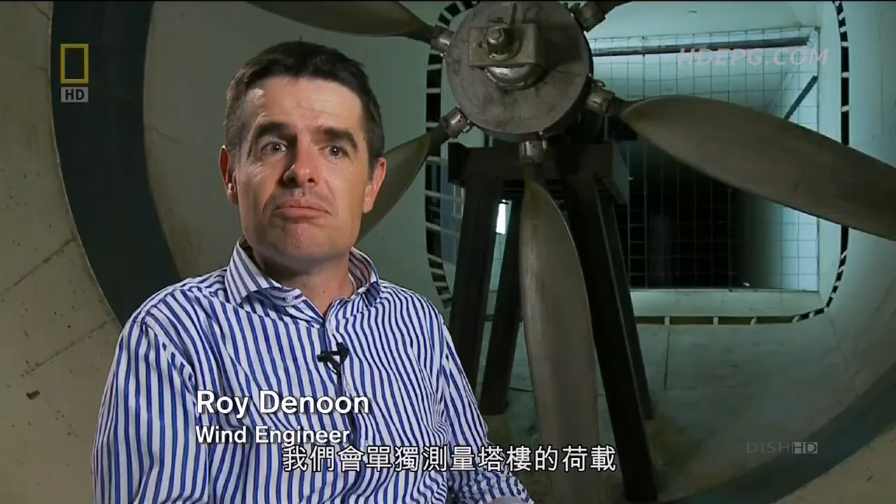Whereas normally with a normal tower, we'd measure the loads on the tower in isolation, with this one, what we're needing to do is to measure the loads on all three of the towers at exactly the same time. So that way we can know how the towers are going to move relative to each other, so we can make sure that they're not going to put excessive strains or movements into the Sky Park.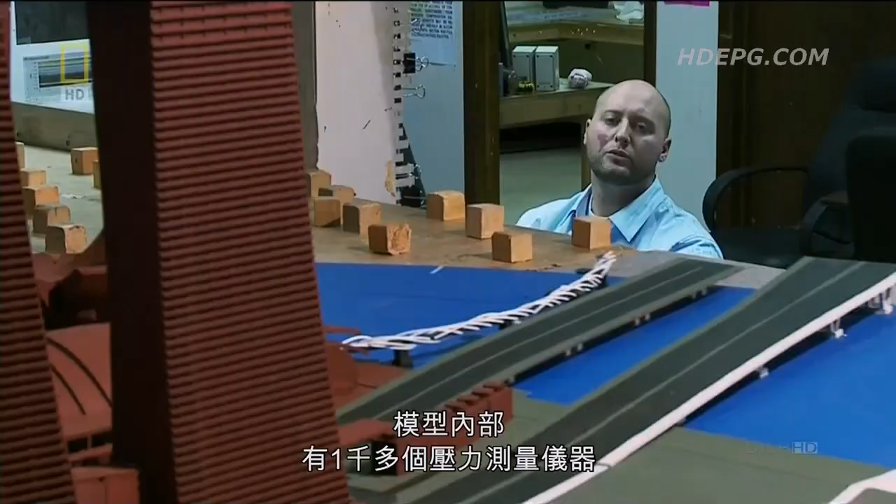During the tests, a scale model of the Marina Bay towers is blasted with 40km/h winds to simulate faster typhoon winds in reality. Over 1,000 pressure measuring instruments inside the model register how the winds affect the buildings.

At the end of the tests, engineers confirm that the three towers can deform by some 200 millimeters during the fiercest storm.

Engineers quickly figure out a solution: movement joints. Inspired by bridge engineering philosophy, movement joints are essentially gaps located between the concrete towers. The huge gaps allow for movements of up to 250 millimeters.

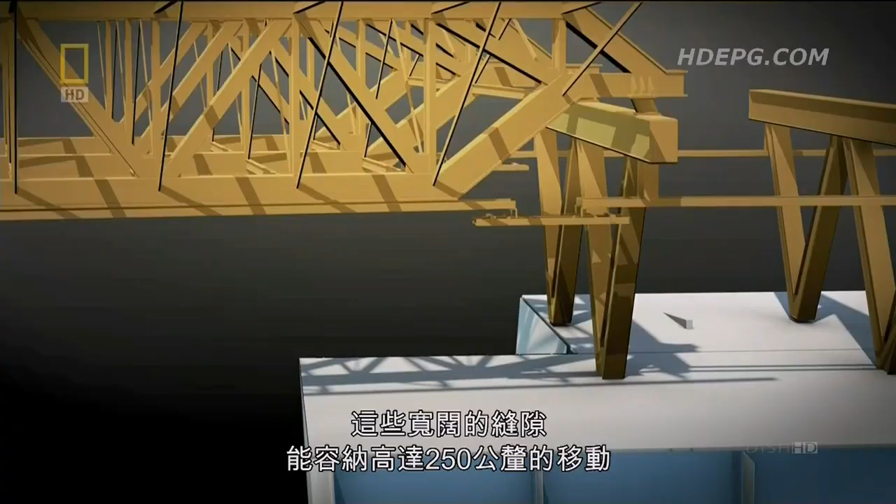Aluminium and stainless steel plates act as sliding components. They can move back and forward over each other, a little bit like you'd see in a flexible bus, where you have that articulation happening in the middle. It's a similar concept to that. To accommodate the differing movements of the three towers, engineers install multi-directional steel bearings below the Sky Park.

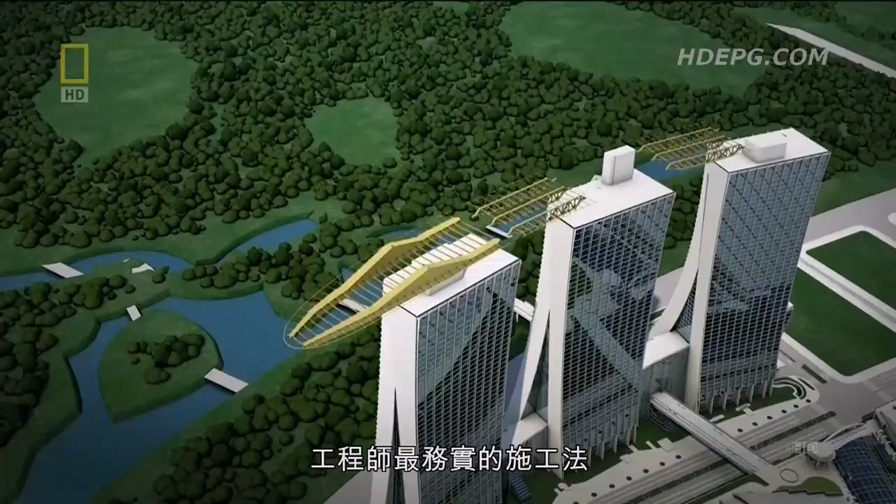Armed with the final results, McKee can now safely begin construction of the Sky Park. Consisting of some 10,000 tons of steel, the Sky Park is as big as an aircraft carrier. The most practical way for engineers to construct it is to break it into 14 segments on the ground before assembling it at the top of the towers.

There's no room for miscalculation at 200 meters in the air. Each segment is carefully prefabricated and tested by steel specialists Yongnam,

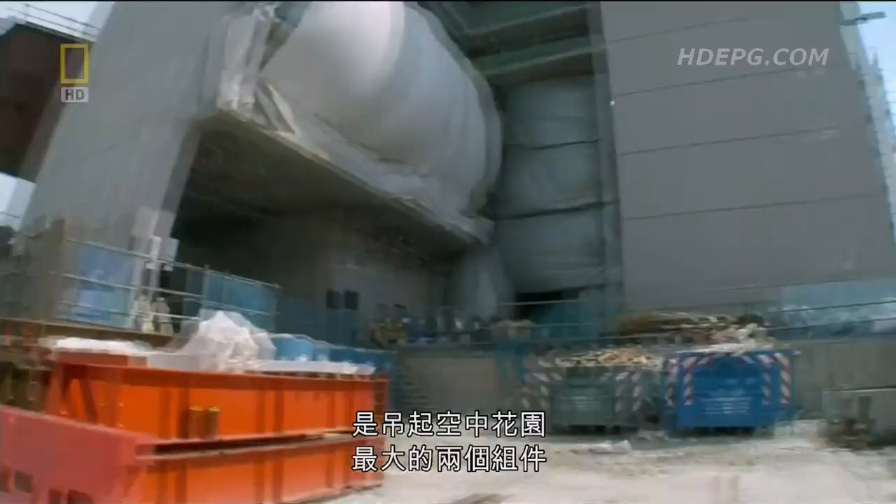and then trucked to the site independently. From the very beginning, McKee and his team anticipate that their biggest challenge will be lifting the two largest segments of the Sky Park, the box girders. Measuring 80 meters long, their combined weight is a staggering 1,400 tons.

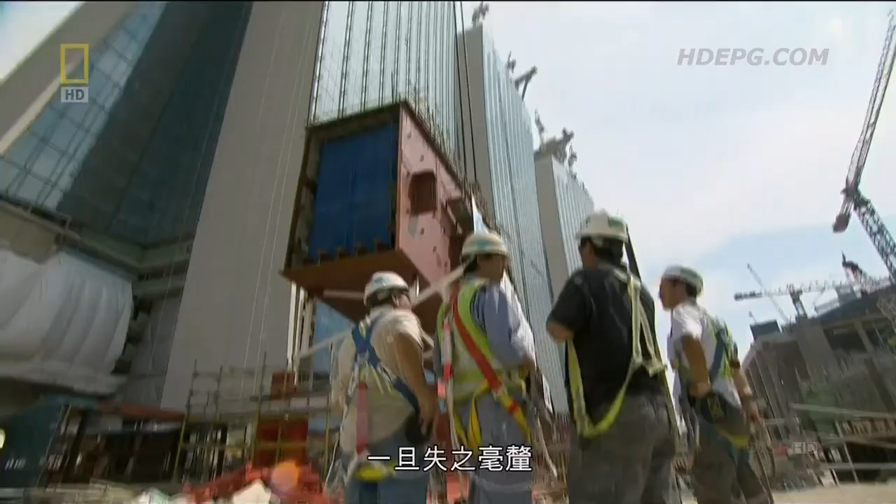How do we feel? A little bit of apprehension. It's a significant lift that hasn't been done before. If something goes wrong, it could be really significant for us.

To reduce risks, McKee turns once again to proven bridge building technology. In a process known as strand jacking, giant temporary lifting gantries made of strong structural steel will use powerful hydraulic jacks to lift the box girders up to the top of the towers before sliding them into place. It will be the longest and largest lift of its kind in the world, and McKee needs the best in the business. He puts a pioneer in the field in charge.

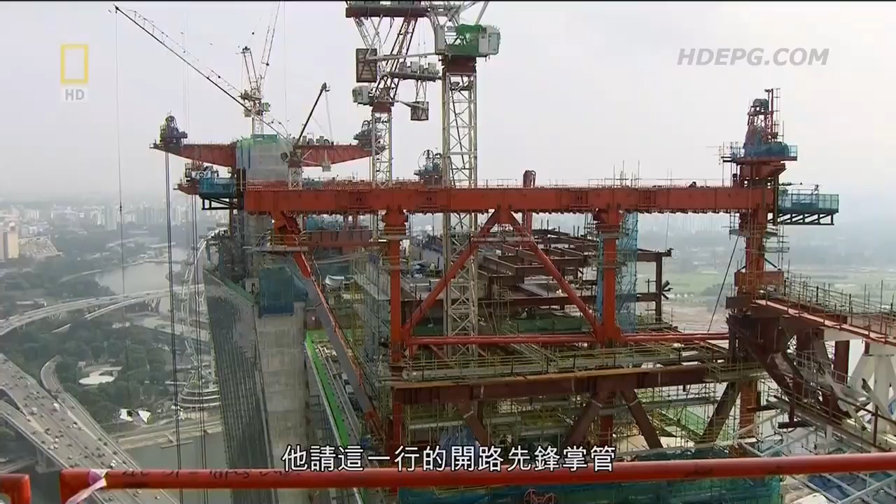Swiss-French company VSL. Engineer Eddie King and his team have successfully raised bridges, stadium roofs, and even Ferris wheels.

The toughest part of my work is that you have to plan everything very precisely, because everything is set up in millimeters. So we have to lift it up and slide it in and position it within 5 or 10 millimeter accuracy. If we don't do it properly or don't do it safely, the biggest hazard is the thing can fall down to the ground.

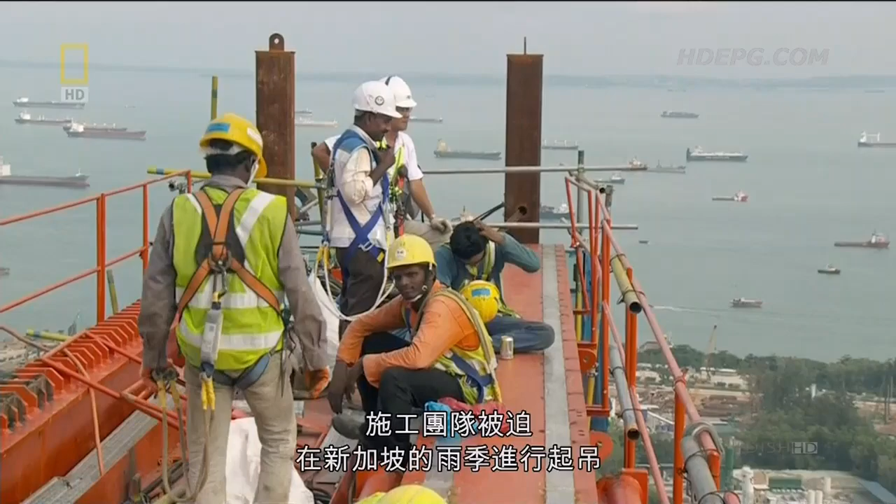Other factors further complicate the lifting process. Due to an increasingly tight schedule, the team is forced to conduct the lift during Singapore's annual monsoon season. It's almost impossible to predict when a tropical storm will hit. When it does, the accompanying lightning strikes can endanger lives. And because the whole operation takes place meters from a jam-packed highway, curious onlookers will be able to see any mistakes the engineers make. It's a potential public relations nightmare.

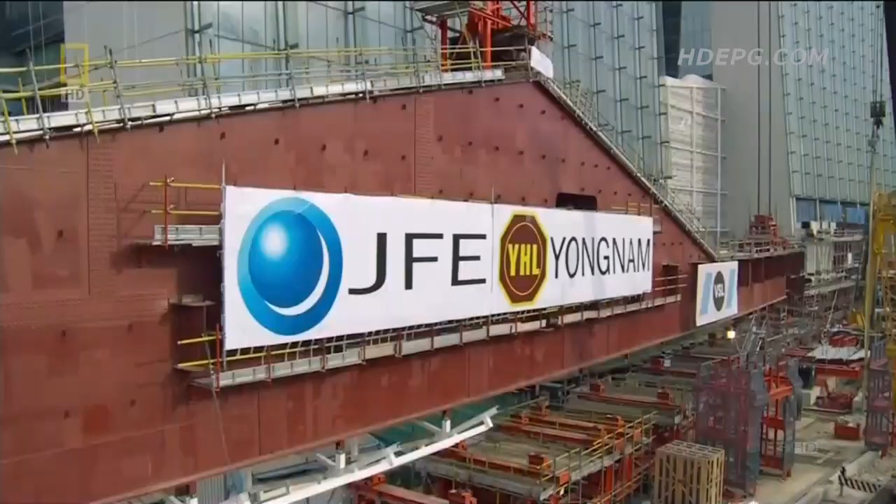Okay, now I stop now.

During an estimated 16-hour lift, the box girders will move at a cautious 14 meters per hour. Eddie King and his team constantly check their weather gauges for any incoming storms. The hydraulic jacks are also inspected regularly for overheating. No one wants the operation to stall in mid-air.

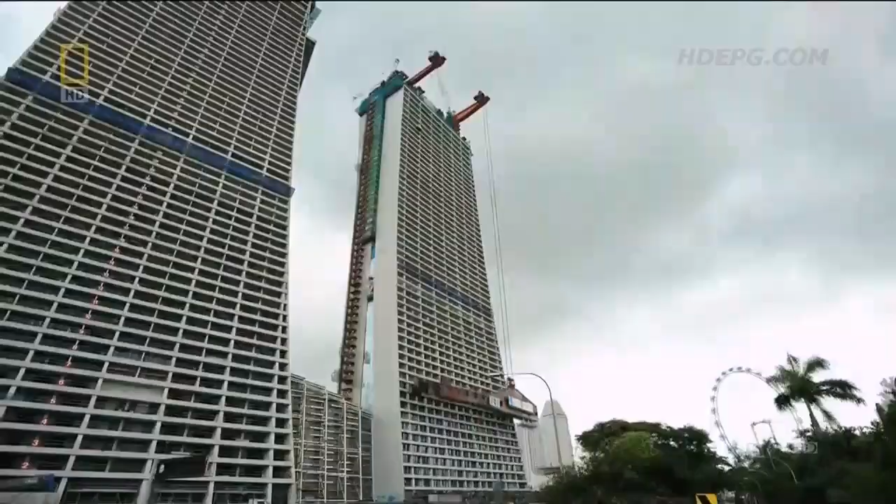Despite the team's best efforts, Mother Nature catches them by surprise. Okay guys, rain is coming. It's better we stop here.

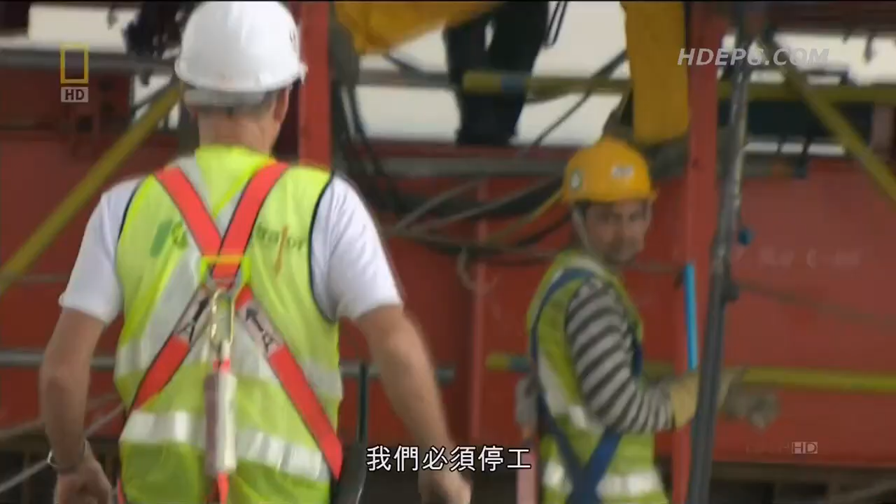An approaching downpour threatens to grow into a lightning storm. We are at 200 meters above and surrounding buildings are quite far away, so there's a chance of lightning striking a high point like this. So we've got to stop and wait until the weather gets better before we continue our lift.

McKee's worst fear comes true. If the girders remain stuck midway for too long, he will have to order them down.

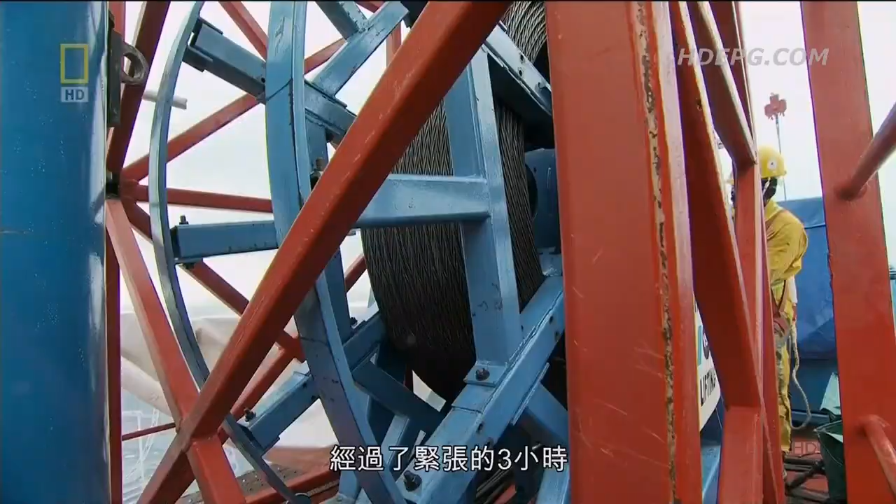After a tense 3 hours, the lightning threat passes, and the operation cranks back to life. By the time the box girders slide into position, it's past midnight. Everything went quite smooth today, so we hope tomorrow we can do the same.

With the lessons learned from the box girder lift, the rest of the segments go up smoothly. As the final piece rises into place, Singapore is already marveling at the team effort behind one of the world's most ambitious building projects.

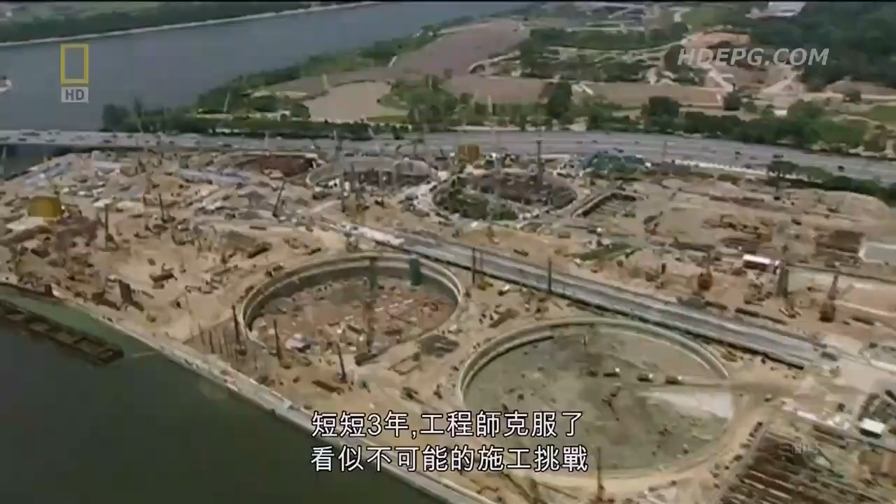In just 3 years, engineers overcame seemingly impossible construction challenges, defeated marine clay, engineered ingenious design solutions, and survived the most debilitating financial crisis since the 1930s. As the finishing touches are put on the resort, the stage is set for an opening party, Singapore style.

Those involved reflect on the project that has already far surpassed their expectations. It's a bit overwhelming, you know. I'm in the process of disconnecting the umbilical cord. It's not easy for an architect. This type of project probably only comes around every 25 years or so. So it's been a lot of hard work, extremely challenging. I really can't imagine, I couldn't list the number of challenges we've overcome along the way to get to today. Everybody is saying this is kind of a miracle, you know, never seen anything like it. And it's rewarding, it's nice.

The Marina Bay Sands, Singapore. Proof that with visionary design and engineering know-how, megastructures can still defy the odds and fulfill the wildest dreams.